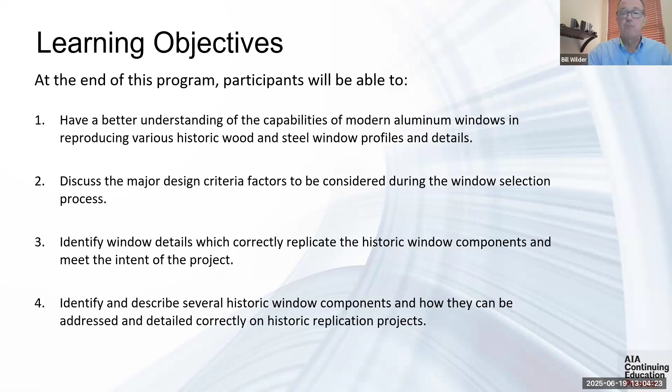Three, identify window details which correctly replicate the historic window components and meet the intent of the project. And four, identify and describe several historic window components and how they can be addressed and detailed correctly on historic replication projects, to ensure the submitted project is compliant with your needs and accurately represents what the end product will look like.

Again, we call this 'Aluminum Windows in Historic Buildings' as a subtitle, and this is kind of a tongue-in-cheek slide that I call the good, the bad, and the ugly. To many historic purists, this is their perception of an aluminum window in a historic building.

As you can see, this is a little over the top, and it's kind of an old photograph, but it caught my eye driving down the street, and I had to take this picture, because again, this is a perception that we get and see out in the industry.

But the industry has changed. In the last 60 years, aluminum windows have evolved dramatically and improved in performance and in how they're able to replicate aesthetics.

Aluminum extrusions and castings can be customized at a relatively low cost, depending on the job size and the number of windows. New dies and castings can be a minimal expense per window if there are enough windows on the project.

Therefore, they can very accurately, almost exactly, reproduce the appearance of the original profile they're trying to match.

So today's presentation will show how aluminum windows have evolved, and also how you can ensure that the submissions and bid proposals you receive accurately reflect the intent and needs of the project.

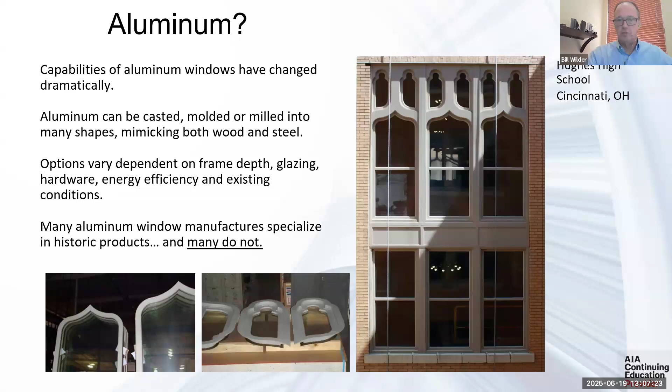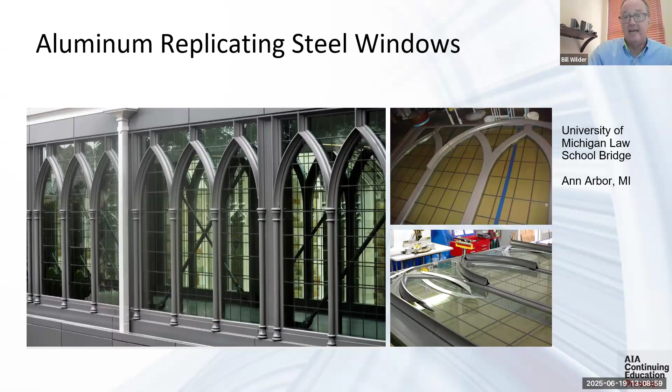We'll get into the specifics now of how aluminum can replicate these old shapes. We'll start with steel windows.

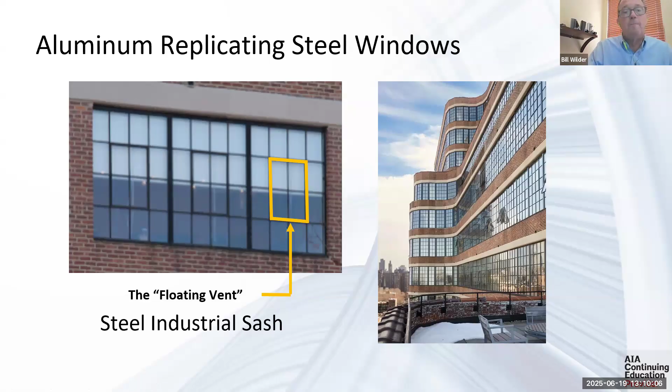For years, the Park Service would complain that nobody was reproducing it well, and on a significant building, nothing was acceptable. Here's a significant building - 5,000 of these windows. This is the type of building that will drive innovation, and it did in this case.

A little over 10 years ago, the owners came to us and said, we want to replace these. We showed them the current technology. We built mock-up size windows, but we put them in wood bucks because they weren't allowed to take these windows out - the New York City Landmarks Commission said no, they are artifacts of the building, they can't come out. So they wanted to put mock-ups in the bucks. They thought they looked great.

The committee came down and said, no, that's not what we're used to seeing. We see heavy sight lines. It doesn't replicate it well enough.

And here you kind of see what they were talking about - these floating vents, and the defining feature of this building was how they alternated up and down. They did not want to lose that, and nothing out there was acceptable.

You couldn't replace them. So the owners tried refurbishing these windows, and it was just way too costly. And when they air and water tested it after they were completely refurbished, it still leaked air and water.

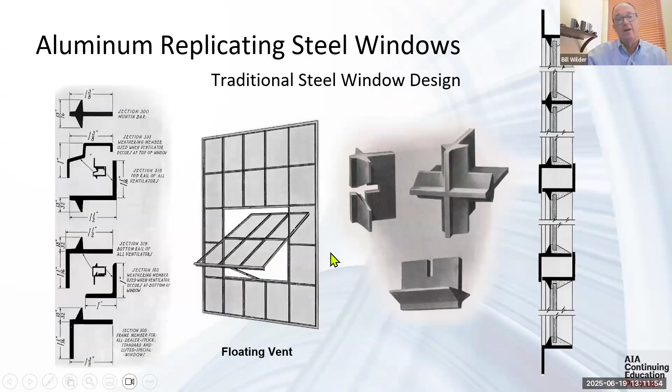They couldn't even get the pressure up enough to run what would be considered an industry standardized test - air leaked in so much. With this being converted from manufacturing or warehousing space to office space, they were losing value to the building. So they asked us, could we design a window? And it had to match - here you kind of see the whole concept of the floating vent in this old literature, and they wanted a reproduction of this.

What we did was build 3 windows, sized so they could fit into a masonry opening on the job, but we put them in a wood frame and took them up there for display. The owner felt so confident they would get approved that he asked the installer to put them in, but to save every little piece taken out and not damage anything, just in case they didn't get approved. So they put the windows in.

They invited the New York City Landmark Commission to come down, walk across the West Side Highway - since this sits right along the Hudson River - and turn around and try to pick out the replaced windows. And they couldn't. Actually, you can, because the glass is much smoother and the low-E coating creates a slightly different look to the glass, but without that, without a trained eye, you couldn't tell. They came back inside, took a look at it, and said, okay, that's acceptable. And they moved forward.

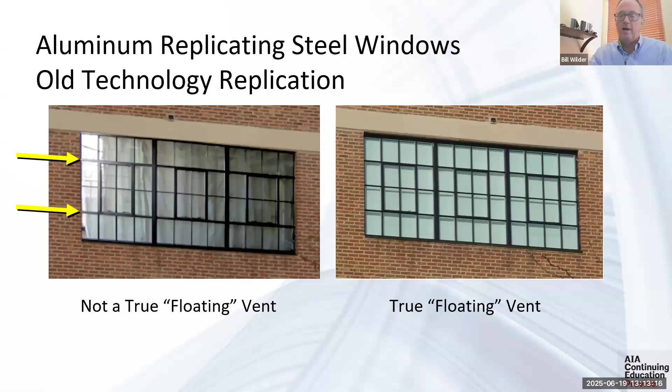Here's an example of the technology at the time, and unfortunately this is still prevalent today. You have to be careful looking at proposed products. Here you see the wide sight line that supports the vent.

The picture isn't great, it's getting a little washed out, but there you see the wide sight line. It doesn't really look like a floating vent. And this is all applied grid work here.

That's applied grid work, but they had to run a true muntin, which is the right thing to do. You don't want that being all one big piece of glass with applied grids, because the grids will bow away from the glass. Expansion and contraction occurs in aluminum, especially if it's dark painted, and it will bow.

Some people will counter that by taping them, but you don't want to tape the muntins to the glass, just in case you ever have to replace that piece of glass. And with expansion and contraction, if it's only taped on, over 5, 10, 15 years it'll start to peel at the end. So typically in commercial windows we don't tape on exterior grid work for those reasons - we want the windows to be maintainable and stand the test of time.

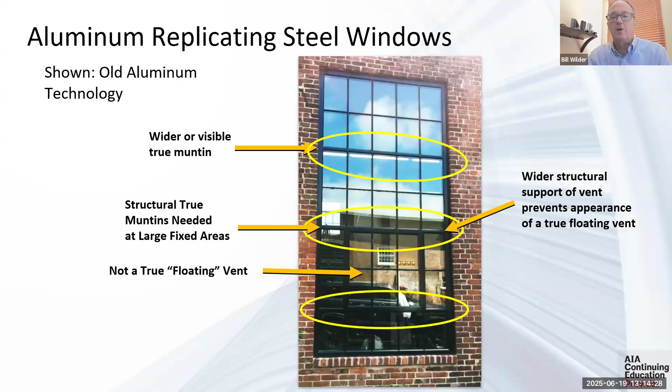So this is the problem. Here was the solution and what's available today. But only a few manufacturers that specialize in historic windows do it this way, and there are other ones that have what we just looked at. Like I said, it's still prevalent today.

You have to be careful when you look at submission drawings that they show every detail, because I've seen ones where they just sort of conveniently don't show that detail. So you want to be careful.

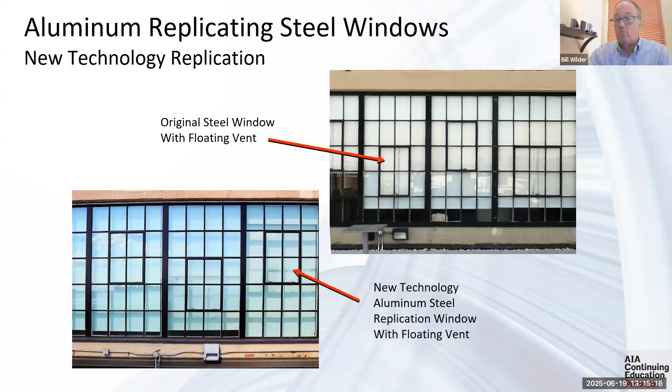Here you see this picture taken at the same elevation on that same building, and this opening right here - when you compare that opening, this is existing, this is new. It turns out to be a great reproduction of the original windows.

Taking a look at this in detail, some of the key things is this concave profile, which was the most common profile. These old industrial sash windows were always glazed on the inside, so the putty was on the inside, and the outside tended to have a profile to it - the most common was this concave profile. Sometimes it was kind of a T shape, but more common was the concave profile. Occasionally it was just flat, but most of those are long gone because they didn't hold up well - they lacked structural strength. It wasn't just aesthetic, it was there for structural reasons and durability reasons.

But here, the key is the old muntin bar was 7/8 inch. The new one is 1 1/8 inch, and there's a reason why it's 1 1/8 - it grows because it had to grow. The reason is insulated glass. Here you see it's 1 1/8.

If you look at this, the old piece of glass overlapped the frame by 1/4 of an inch. However, insulated glass has to overlap the frame by a minimum of 3/8. Some glass manufacturers require 1/2 inch, but there are ones that will still only require 3/8 of an inch and give you a warranty. You want a glass warranty on the building.

So therefore, you have to manage and stay within the constants in the industry, which is a minimum of 3/8. So in essence, you're growing an 1/8 inch at each lite of glass. You go from 7/8 to 1 1/8. And then at the vent, it grows about the same amount. So that's a result of insulated glass.

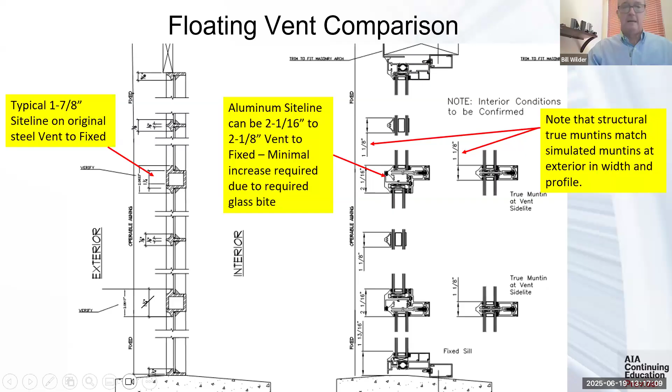But when you step back and look at, in this case, a 4 foot by 8 foot window, you really don't see the difference. Because you're maintaining the same profiles, the same shape, and the same proportions, it's not really noticeable, and you're getting a high performance product in the end.

So how do you detail this to ensure you're getting the right product? We always recommend that you show the cut at the vent and also the supporting muntin bar. So here you see the supporting structural muntin and then the vent in there and then the simulated muntin. This tends to be the cut that some manufacturers will leave out if they don't want to show it, because it's an inch and a half, or maybe even a different profile.

Sometimes they'll do this - it'll be a trapezoid profile out, but the grid work that butts into it is concave. I think the Park Service, I heard them refer to those as a Frankenstein window. It's parts and pieces of everything. It's not one consistent look that you're looking for in your project.

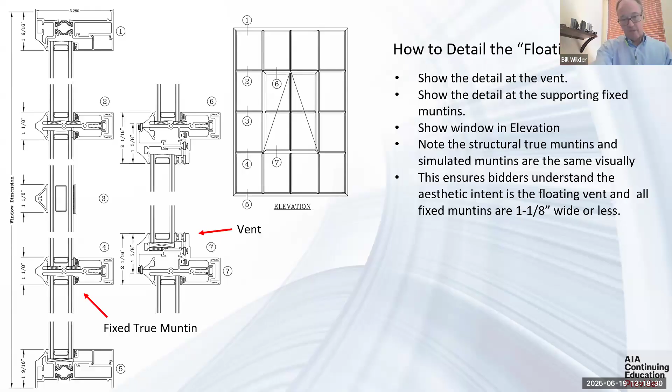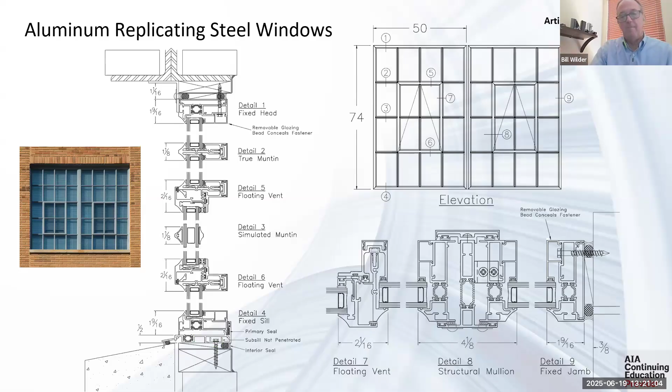So if you ever have to change that piece of glass, you can do it without having to get to the exterior of the building and cut that off, then pull that piece of glass inward, put the new piece of glass in, and then get back up on the outside of the building and put a new one of these on, because the old one probably got damaged—typically gets damaged because that's strong tape that you pull off of there. So typically you don't tape anything onto the exterior glass.

The interior is a different animal. You don't have the expansion and contraction that stresses it. And if you're going to put stuff back on afterwards, you're standing in front of it—you're not eight stories up in the air on a swing stage trying to tape this on. With that pressure sensitive tape, if you want it to stay on, you have to apply constant pressure for several seconds across that. Not so easy when you're hanging off a building.

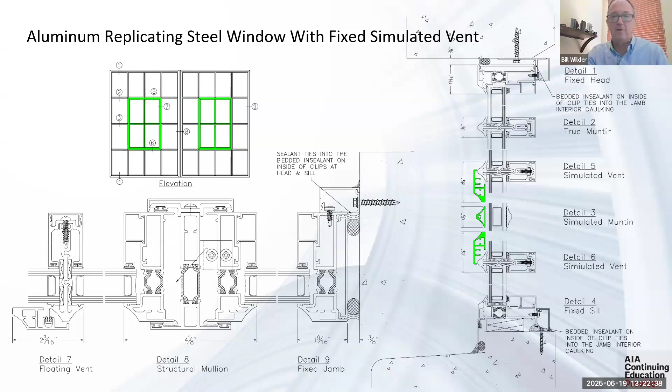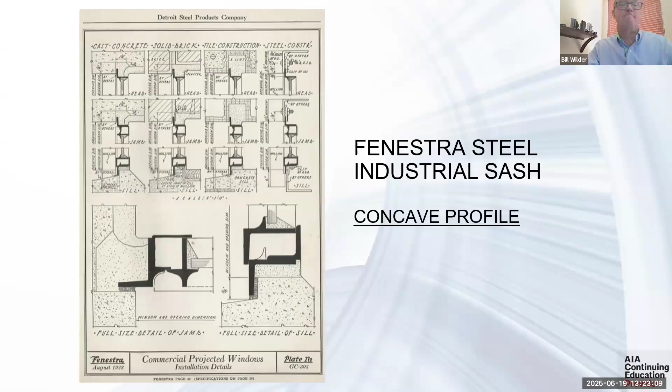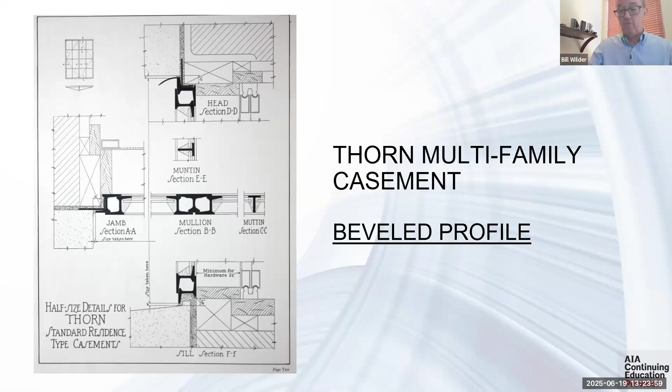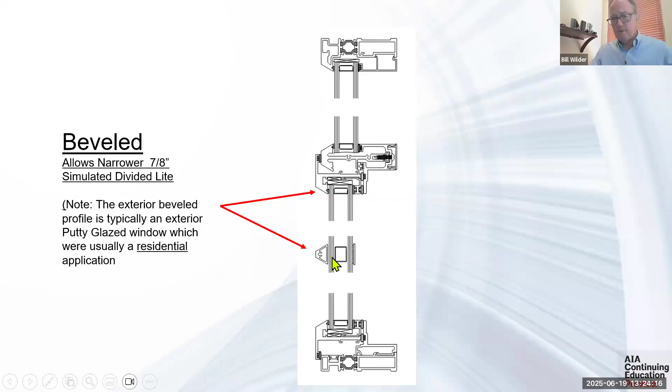You see a lot of them go up in the air, like in New York City—they were still residential buildings, apartment buildings, maybe 12 to 15 stories tall. And they show these profiles on the exterior. Well, this is basically the same window, but with different profiles. You don't have the concave profile anymore; you have the beveled profile and the trapezoid shape down here that replicates the old putty glazed, exterior glazed windows.

On this particular job, when they applied for a replacement, the Park Service said no, these windows are in great shape. But what they didn't know was what was happening. The owners and the architects brought in facade and masonry consultants who took a look at the job and determined that these walls are deteriorating, because the old steel windows can't keep out the water, and the water is getting down into the walls and creating damage.

So at that hearing in DC, the Park Service determined, yeah, you're correct. The main goal is to save the building, and to save the building we have to replace the windows. So they approved replacement—while they were picky about it, they approved replacement and saved the buildings.

Now we're going to pivot to aluminum replicating steel hung windows. Here we see three very prominent buildings I think most people would recognize: the Chicago Tribune Tower, the Empire State Building, and the Chrysler Building. There's a couple of things here that tie these together. They're all built around the same time, that early skyscraper age back through the late 20s and early 30s. The other thing that ties them together: they all use the same steel double hung window as manufactured by Campbell Metal Window Corporation.

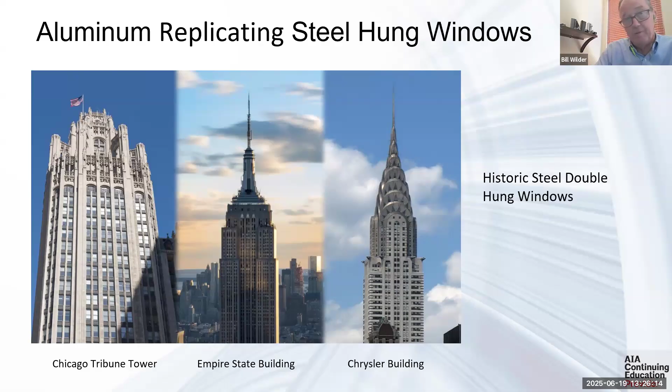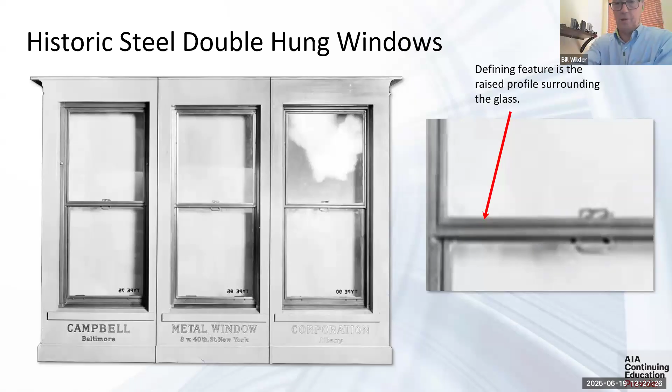Kind of the opposite—here you have an inward groove, whereas on a wood window it's a profile that sticks outward, a trapezoid profile. Here you see a close-up from old literature from Campbell, showing this raised profile and the pull-down handle. The significance of this profile, like I said, is just like the putty profile everyone recognizes on a wood window—that's critical to reproducing it. Critical to reproducing this look is this raised profile, the pull handle, and also the perimeter frame shape.

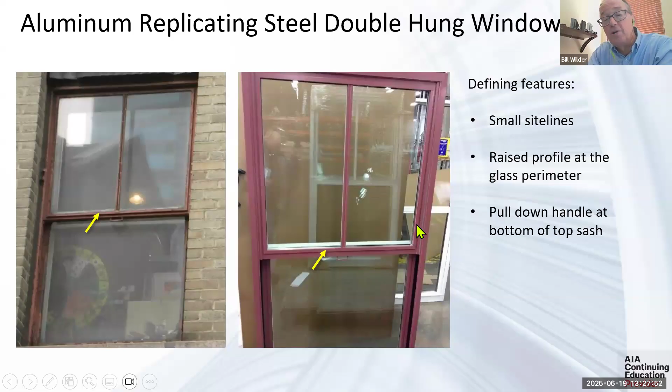Here we see the same picture of the original window, and here you see a replacement window. You see the pull down handle, and if you look closely, it's not a great photograph, doesn't show up great on the slide, but you see the raised area around that piece of glass.

You'll see the raised area doesn't continue, there's no continuation. It's a true picture frame around that piece of glass. So here we see it in a couple of comparison drawings that really confirm the product being submitted, or if these were in a bid document, confirm exactly what we're looking for here. You see the three critical items that are being matched: the raised profile around the glass, that little rectangular shape, there it is on the original window.

And over here on the right, you see it on the replacement window. You see it again up here, and again around there. The pull down handle, it's right here, replicated. And even the perimeter metal frame was always this 1.5 inch dimension from the masonry. The metal portion of it was 1.25 inches, and then there was always like a sealant bead of a quarter inch.

But very consistent on these. And here you can see how it can be replicated in aluminum. One word of caution: if you're looking at a project like this, you should always have demo work done to see if the window frames can be removed without a significant amount of collateral damage to the building, because those old steel windows were literally mortared into the walls and can be very difficult.

And if you're working in occupied space, it may be cost prohibitive to completely eliminate that frame. If that's the case, and it can be proven, the Park Service will allow leaving part of the original frame in place, because it literally can take jackhammers and so forth to take that out. So you have to be careful with it.

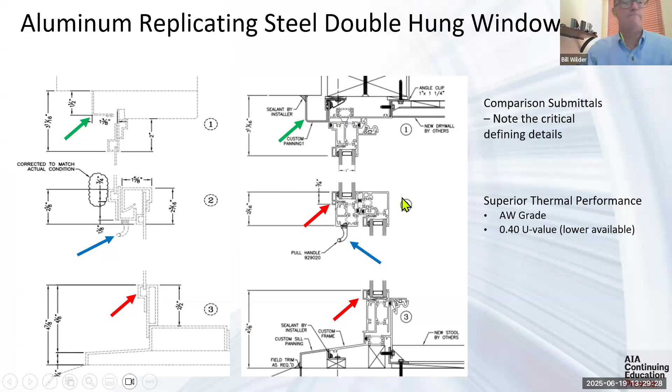And here we see a replacement. Now, this is in New York City. The criteria on this job was a little bit different. It wasn't a National Park Service job, it was New York City landmarks, and they valued certain things differently.

They didn't do the raised profile or the handle, but they were really critical of the overall sight lines and replicating this mullion, which they saw as the real defining feature on this. So they looked at this job maybe a little bit differently than if it was in Philadelphia or Chicago or something. But here you see the window manufacturer, you see these old mullions, and you see how they were replicated.

This was actually a compilation of about 9 different extrusions that went together. This little decorative picture framed grill work was actually applied at the factory to the flat piece of sheet metal from the backside. It's corner keyed together, so you have really tight joints. All the weather resistant part is back behind that in the mullion, so that was just sort of a water shield out there.

So everything performed very well. All the thermal breaks are hidden, hence why this thing took 9 separate pieces of extrusion, all kind of snapping together out in the field to come from the factory cut to size. They literally just kind of built them and put them together and then popped in the window.

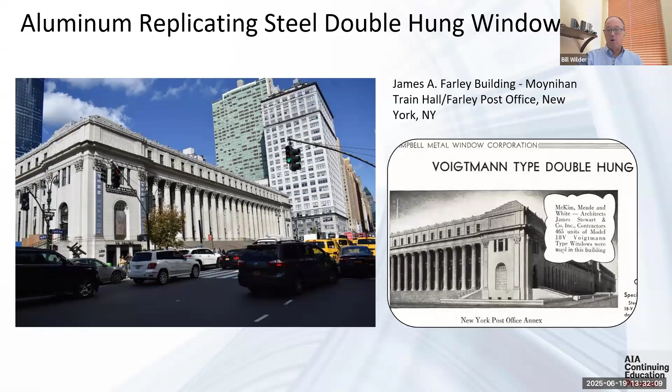Perhaps some people here listening in have traveled through that and walked around that building. What's key on that building is this profile changes. It's a concave profile on the exterior windows around there. Well, that can be replicated in aluminum without much difficulty.

Here, they couldn't really remove the old frames because of all the decorative metalwork around it, and you'll see that on the following picture. So they had to keep the frame in place, but because the sash was so big, they had room to fit them in there and match all these sight lines and do a great reproduction of it.

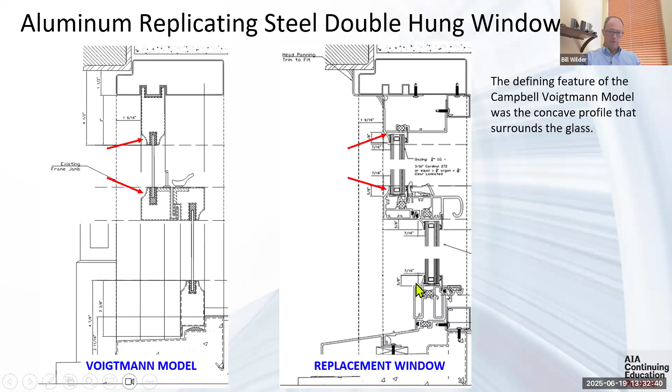Here you kind of show why. If you look at the window here on the right, the arrow is pointing to that concave shape, so it shows up well. Here's all this exterior ornamental metal that had to stay in place there.

So they couldn't remove the old frames because all of that would come down, and they didn't want to rebuild all of that. One of the reasons was if you walk around this building, 90% of the windows on the outside are refurbished original windows, but there's a handful of them that had to be replaced. So they were replaced in aluminum, a near exact match to the original steel.

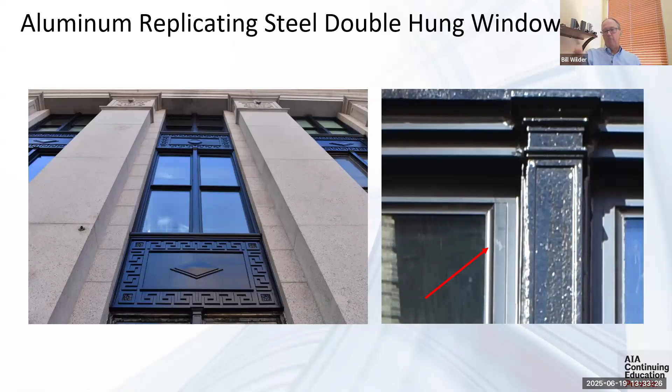And if you're on the interior in the courtyard areas, there's several hundred windows that were all replaced, but with this historically accurate window.

Now let's talk about aluminum replicating copper clad windows. While that sounds difficult, to be truthful, copper clad where they're wrapping over wood, the profiles tended to match and sight lines tended to match old wood hung windows. So if a manufacturer has a window that does a good job of replicating a wood window, it probably can replicate a copper clad window.

And the real trick is in the paint. You just have to have a paint in the color that matches that patinaed copper finish, as we show here.

Now, there's something a little bit unusual with these windows at Asbury Park. This sticks out onto the beach in Asbury Park, kind of a famous location for several reasons. But these are all triple hung windows up there, and you can see that each one has their own pane.

Each of the old wooden sash actually operated. And on this particular replacement, all three of the aluminum replacement sash do operate.

Now, in more recent years, window manufacturers that replicate this have kind of pivoted to the top two sash not operating. It's a cost and energy efficiency thing because most times people don't need that top sash to operate, they just need the bottom sash to operate.

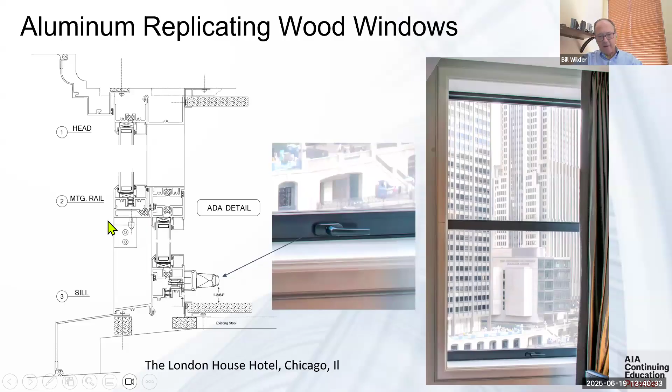And you see the exterior profiles - this thing looks like a hung window right down to the sash lug. I'll touch on those sash lugs in a minute here.

Another case of aluminum replicating wood windows - these are old wood casement windows at Yonkers City Hall, the old historic building. You can see they were replicated; this is the new aluminum window, replicating the ornate grid work and curvature. They actually went to a tilt and turn window because you could just tilt it in from the inside and get ventilation out the top, or open it like a casement window in case you had to get out to clean it or whatever.

Something kind of unique about these windows is at the interior of a couple of the courtrooms, they deemed these interiors to be significant and wanted to take them back to their original look. The reason was they were kind of famous because they were where the courtroom scenes in the movie My Cousin Vinny were filmed.

So they wanted to maintain these because they were getting a lot of tourist attraction at that time. They wanted to keep this look and match all the existing woodwork on the interior. So they wanted a window that would match the original, with a natural wood grain finish on the inside.

This is aluminum, and we use it typically on historic jobs. You don't need this ornate profile on the inside, just a flat bar showing it. So from the outside, it looks like a true divided light, but now they want it to look like this on the inside too, creating a profile.

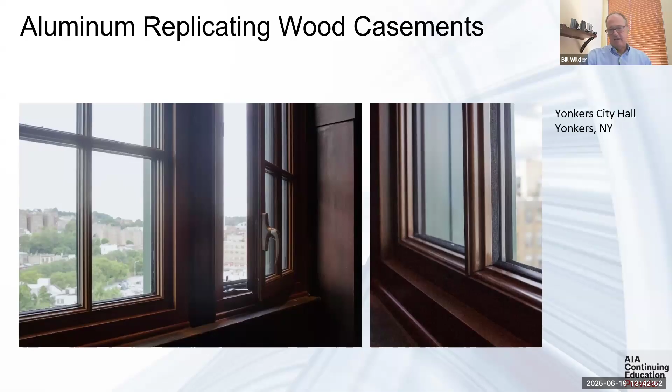There's a cost to it, and it works better in some applications than on a hung window. We have a lot of parts and pieces and glazing beads coming together, so it kind of loses it. All that joinery with the wood grains doesn't work as well. But on a window like this, or a fixed window or casement, it works out great, as it did on this project.

Now we get into aluminum replicating wood hung windows. This is an interesting photograph. The Milton Hershey Alumni Hall were very concerned about the accuracy and how the look of these windows were going to reproduce, so they asked window manufacturers to put in samples. Here is a sample that was ultimately approved.

There's two different types of windows here. This one is a true divided light where the muntin bars are an exact match, true divided lights. This one is all one piece of glass, simulating true divided lights. There's a reason we offered this as a voluntary alternate: while the center of these true divided light panes performs well thermally, it only performs well in that small center area. The perimeter doesn't perform as well, and neither do the muntin bars.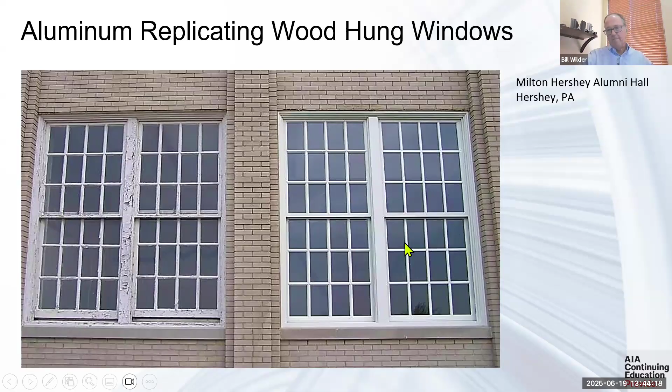So they decided, hey, this one looks great, and we get better thermal efficiency with all one piece of glass. That's why you see simulated divided lights versus true divided lights in the industry.

So talking about wood windows, let's talk about nomenclature, or names. I mentioned brick molds already, that's this part out here that goes around the head and the jambs right up against the brick. There's a little rectangular stop bead that gets mimicked, typically with a panning shape. Here's the muntin, that true muntin, you see it's a trapezoid shape on most wood windows.

And the other thing we'll talk about here is this little component, the sash lug. We'll get to that in a couple slides.

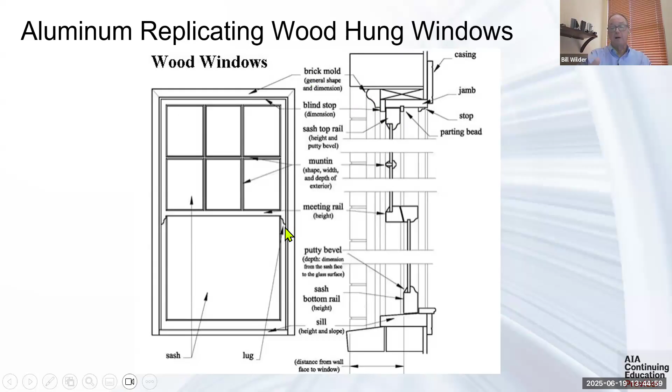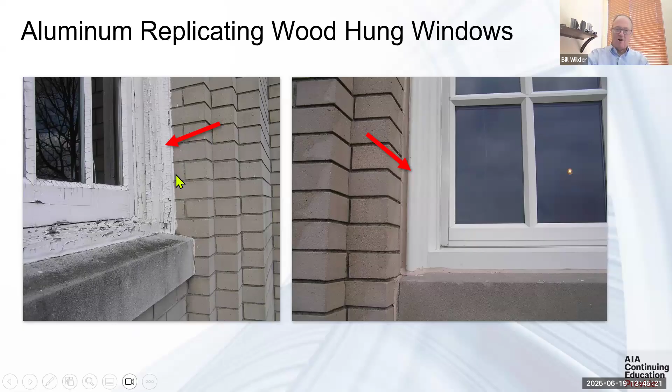So here, from those same mock-ups, you see it's an exact reproduction of the existing brick mold, right down to every little shape, profile, and dimension. This one, of course, the finish is nice and clean. Here it's hard to tell, with many layers of paint and caulk and so forth, but it went back to the original.

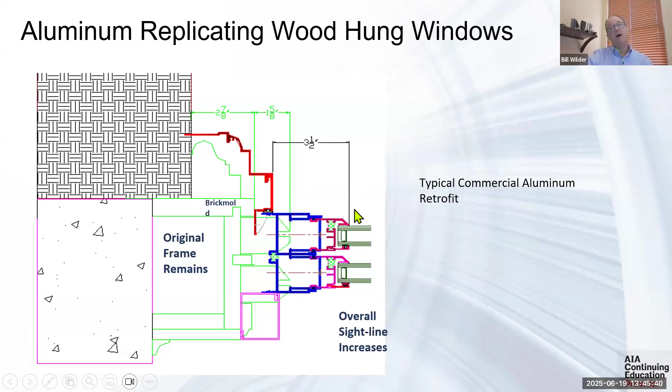What was done here was the typical way of installing: we leave the old frame in place, and they call this jumping over top of it. It's economical, it doesn't disturb the interior finish, but it doesn't work for historic because of this big increase in sightline. So it was done on this project, and is typically done and expected unless you can prove you can't remove the interior frames, or it's cost prohibitive or whatever.

Here the original window frame is removed, and therefore you put in the new window frame. If you look at these profiles and dimensions, they're almost identical. The profile's a little different out here, the double hung aluminum window looks a little different, you get this little step out here in the sash. And because there's insulated glass, you don't have as much room for as deep a bevel right there.

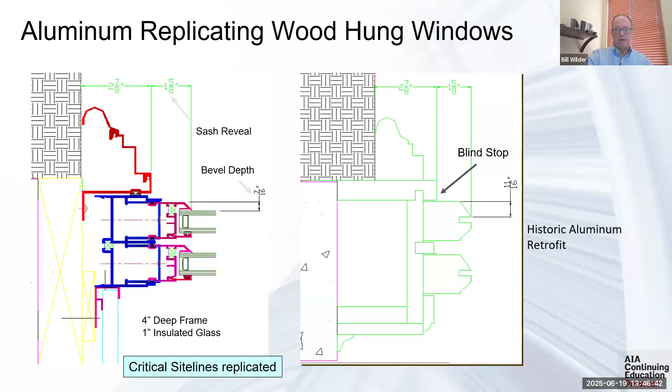That's a sticking point with the Park Service. They want to see that bevel as deep as possible, but it's a challenge. Window manufacturers that specialize in historic windows have tried to increase this and be as historically accurate as possible. But more recently, the industry has pivoted away from aluminum double hung windows to single hung windows. The Park Service used to never accept a single hung window replicating wood windows, and here's why.

This is a typical, older design of a single hung window. This is the top sash, and here it looks great—that looks like the wood sash, with your stop bead and brick mold. But pivot over to the bottom sash, and this doesn't look anything like the wood window, because this window frame covered up the bottom sash and what should be exposed. That was done for economics. These single hungs weren't really designed to be historically accurate.

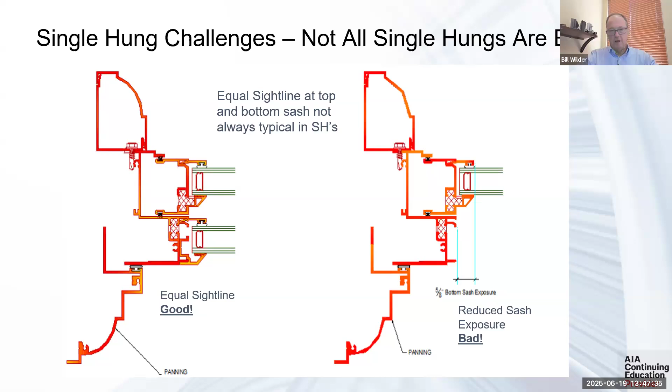But on that 360 North Michigan job overlooking the Chicago River, a new single hung was designed that did accurately reproduce it. That's the window here on the left. You see here's the old technology, here's the new technology. Unfortunately, there are still some of these old ones prevalent that try to get approved on historic jobs.

So you always have to ask for a cut at that bottom sash, to see what we call the sash reveal of that bottom sash, so it looks like a wood window.

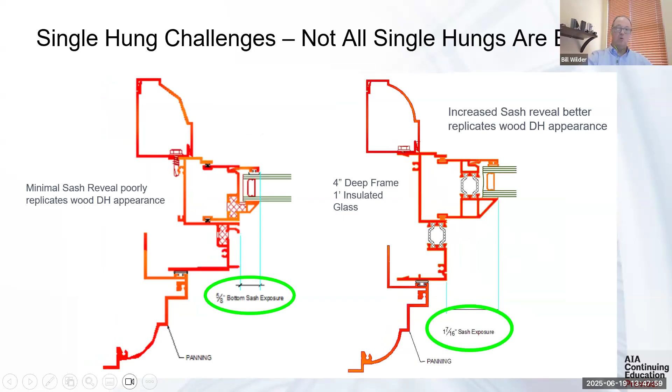Here we see a great example. This job was done at the same time as that one. The submission drawings were done before the new product was designed, but it got held up a bit. I received a call from John Sandor at the Park Service one night saying, 'Bill, we know you have this new window. We're going to reject this window because it's the old technology unless you can get me drawings.' Within 24 hours we had new drawings and it got approved.

And you see why—here is this single hung window, and you can see the old sash down below. This job had other challenges: these windows were over 10 feet tall, and they had to meet hurricane impact at the corner zones of up to 80 PSF. So they had to be structurally strong enough to maintain that 10-foot height and still be historically accurate. And that can be done.

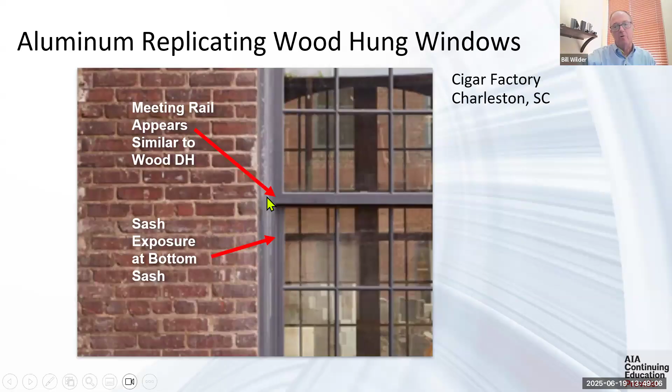Here you see, well, this is before it was cleaned, but you see the top sash and the bottom sash. The meeting rail goes the whole way across, better replicating the look of that wood window.

Finally, one of the last items is these sash horns or sash lugs that we see on a lot of wood windows. We showed this drawing earlier—the sash lug is actually a continuation of that stile, done for practical reasons, not aesthetics. They wanted that to continue longer to reinforce the joint, because this mortise and tenon joint could split easily right here. So they ran them long for structural strength, but it's often done incorrectly—it's a continuation of that rail.

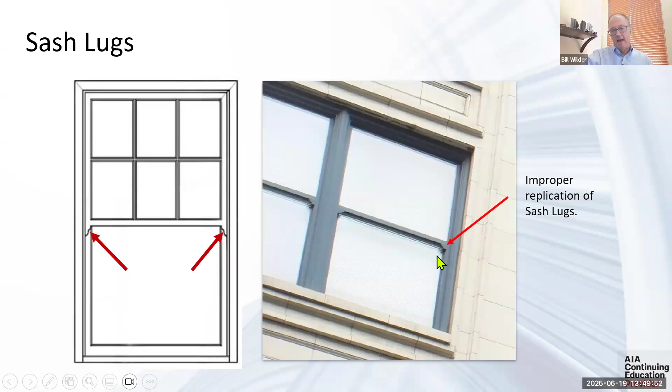Here's a picture of one done incorrectly—that's not a continuation of the rail, it's overlapping over the top, and it's just sheet metal with no depth to it. Here's how it shows up differently. This is old technology, single hung windows—there's no room for it, you'd have to put it out in the glass.

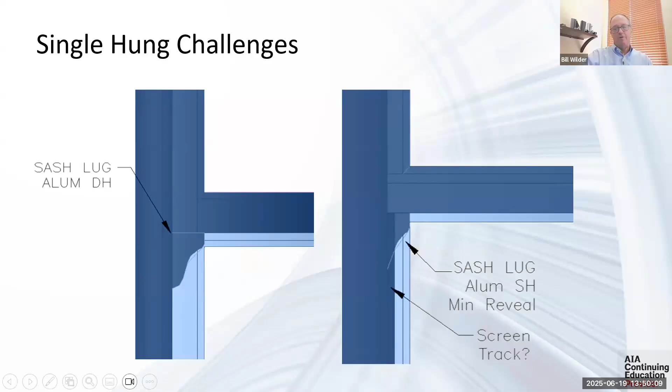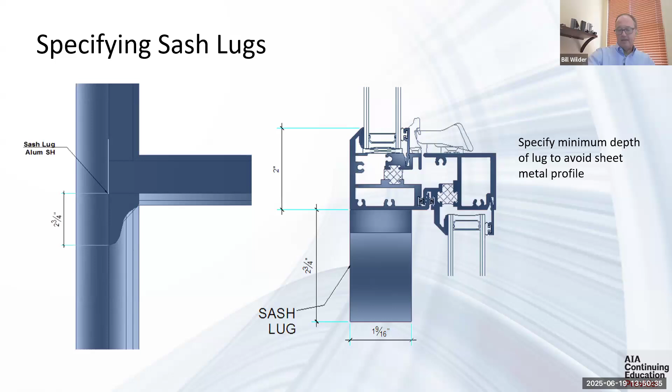So how do you ensure you get them correctly? In your bid documents and submittal drawings, it can be shown accurately. You want a straight-on elevation drawing and a cross-section cut looking down the meeting rail that shows the depth of it. Here it's colorized to show it, but here's how it would appear on a set of bid documents.

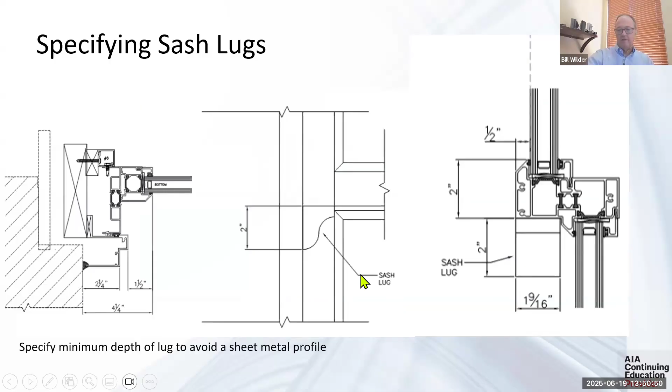It's like this, where you show it in this cross-section. We show the depth, we show the position relative to the edge of glass.

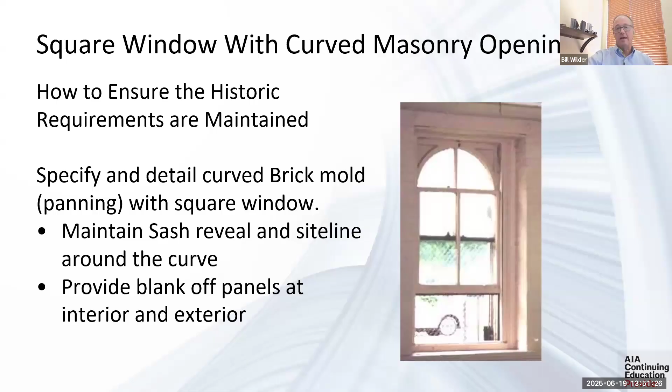Not always—there are true curves out there, but probably 90% of what you see driving down the street are exactly this. Here's an example from a project in Pittsburgh, showing the new windows and the old wood blank-off on the existing windows. Take a look right through there—that's an example of it done incorrectly. Here's a close-up: they got the panning going around, but you can tell that's a square window. They didn't continue the visual effect of the sash curving around. This is common, so you have to make sure you don't get this.

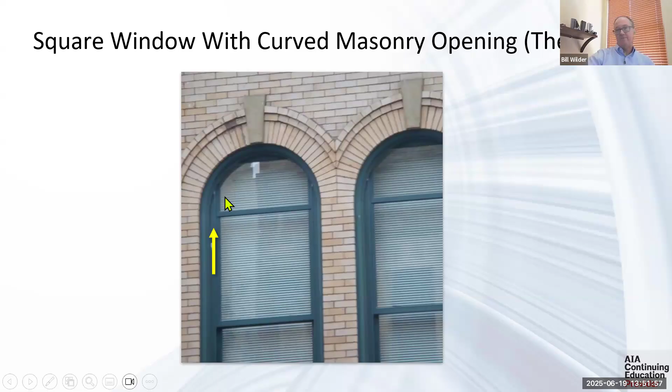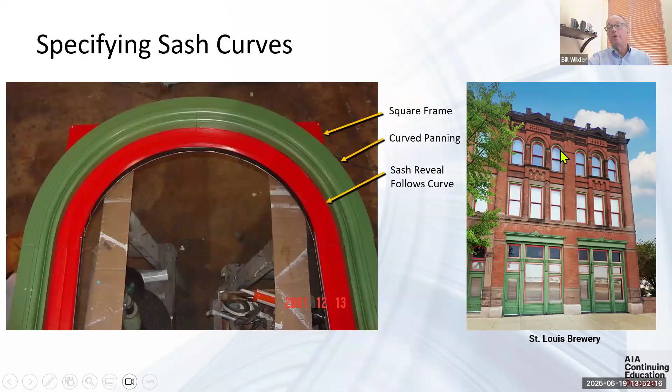And here's it done correctly—a prominent building you might recognize, the colors here, and the fact that it's a St. Louis brewery. Here you see the sash reveal does follow a track around it. There's the brick mold, but you see the square frame—it's in there, and that's the square sash. But when you look at the building, they look like true curves.

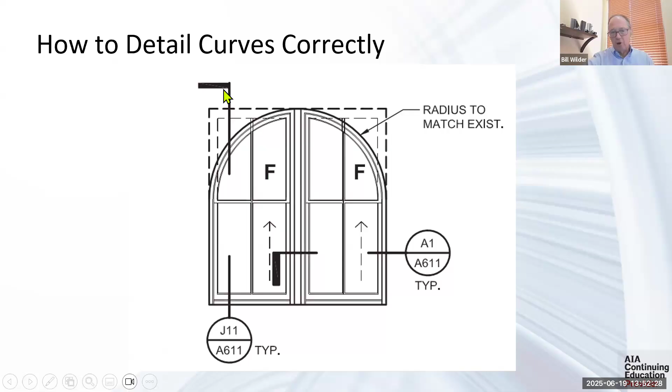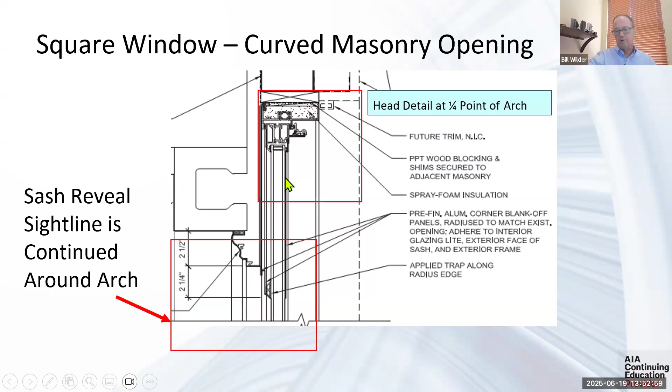So how do you ensure you get them? You don't show a cut right here, because that looks like it does at a straight jamb—that looks the same everywhere. You show this cut at the corner. At that high point, this looks like regular panning—there's your frame, window doesn't look anything special. But at that quarter point, you see the window frame continue straight across the head frame, while this brick mold mimics the sash track down along the arch, completing the illusion that this is a curved window. On the interior, there's blank-off metal, so you're not looking at the back side of it.